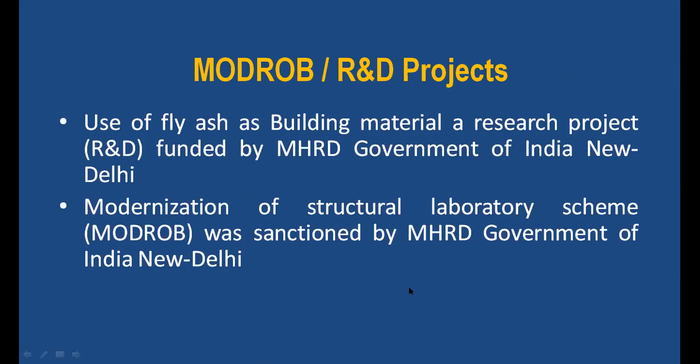Some of his R&D projects and MODROB projects include work on the use of fly ash as building material research projects, funded by MHRD, Government of India, New Delhi. He also worked on the modernization of the structural laboratory scheme, that is MODROB, which was sanctioned by MHRD, Government of India, New Delhi.

Preparation of the draft code of practice for stressed steel bridges for the Indian Roads Congress is a major contribution of his.

Some of his membership details: he is a life member of the Institution of Engineers, life member of the Indian Concrete Institute, life member of the Association of Consulting Civil Engineers (ACCE), life member of the Indian Water Works Association (IWWA), life member of the Indian Society for Wind Engineering, and life member of the Indian Association for Structural Engineers.

Regarding seminars, workshops, symposiums, and conferences: he was convener for the Second National Conference on Wind Engineering (NCWE) in 2004, organized from 12th to 14th February. He also organized a number of STTPs.

In association with other bodies, he has contributed as an examiner for PhD and MTech projects for Amravati University, Nagpur University, Pune University, Shivaji University, IIT Madras, IIT Bombay, and MANIT Bhopal.

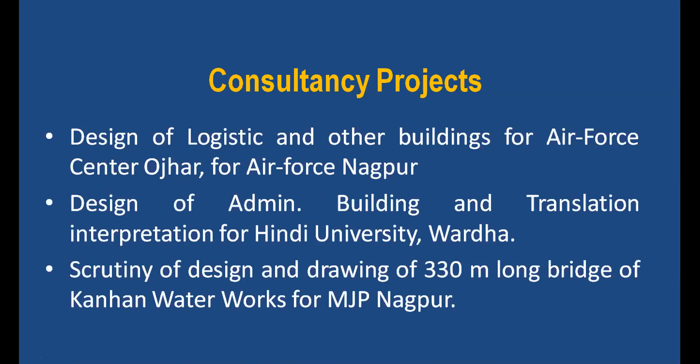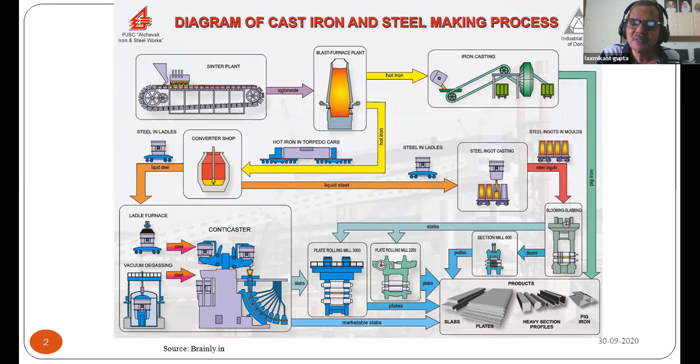This is a flow diagram of the steel making process. In the hot rolled process, iron ore is converted into a basic material, which is then placed in other machines with all the processes, and we get slabs, plates, heavy sections, and pig irons as products of basic steel. This product is then converted into our basic structural steel sections in the rolling mill. This is the layout of the steel plant, where the basic steel material is generated from the iron ore.

Now, why is steel considered a perfect material? It has some native properties: very good strength, very good ductility, and is capable of standing substantial inelastic deformation without losing strength. The very good strength refers to its tensile strength, and a good product of structural steel has good ductility. Therefore, if it has good ductility, it is capable of standing this substantial inelastic deformation without losing strength—these are related to each other. If ductility is good, the third property will definitely be good.

So steel has good performance; it is seen that there is good performance during many earthquakes. A renowned structural engineer said that well-designed steel structures don't need cosmetics—they give good aesthetic if properly designed. Meaning if the force required is 100 ton, and you design for 110 ton, then it looks beautiful. But if the force required is 100 ton and you design the structure capable of taking 200 ton, then it will not look good. So well-designed structures don't need any cosmetics; they give good aesthetic.

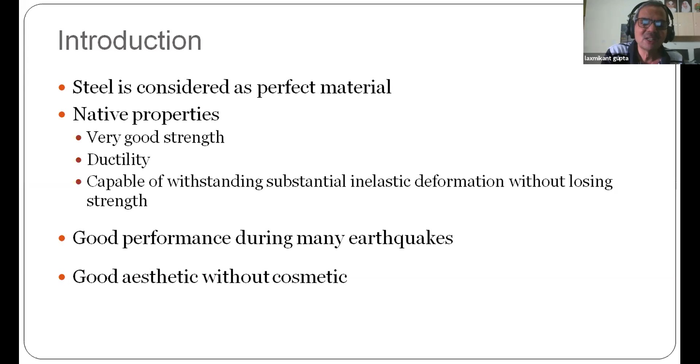Now, types of steel. Here I am cautioning you all: in early days, there were many codes related to structural steel—IS 226, 2062, 1977, 8500. All these codes—226, 1977, 8500—have been merged into a single code, IS 2062. Of course, the merging was done in a phased manner, not in one stroke. Initially 226 and 2062 merged, then thereafter 1977 and 8500 were merged. So now there is a single code which covers all types of steel, that is 2062.

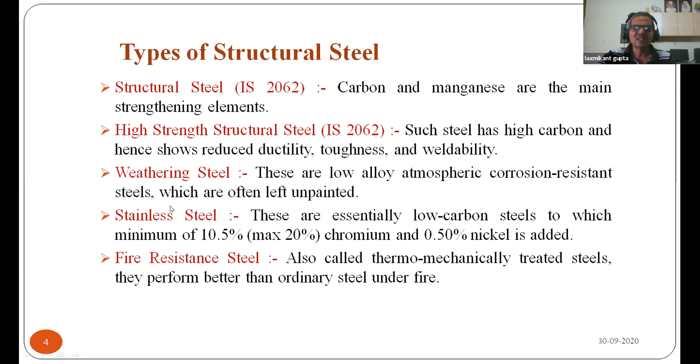2062 covers carbon steel, where carbon is the main strengthening element, that is structural steel. It also covers high strength structural steel. Then there is weathering steel, and also stainless steel. There is also fire resistant steel, also called thermomechanically treated steel. So the structural steel in our question conforms to 2062; these other three are special steels that may be needed at special places.

Now these are the basic properties to be considered, as per IS 800:2007. Density, unit mass is 7850, modulus of elasticity E is 2.0 into 10 to the power 5, Poisson's ratio is 0.3, modulus of rigidity G is 0.769 into 10 to the power 5, and coefficient of thermal expansion alpha is 12 into 10 to the power minus 6. Some people take their own values—let's say if you take E as 2.05, then your deflection will change.

The IS code has made it standardized that the property should be taken uniformly for all design and analysis purposes.

These are the various forms and shapes of structural steel: I section, L section, channel section, T section, hollow tubes, and flats. These are all basic sections.

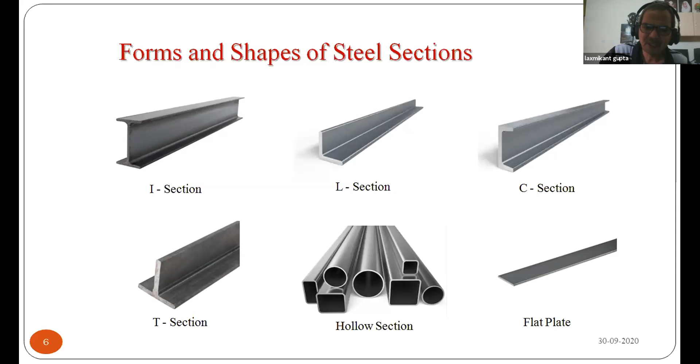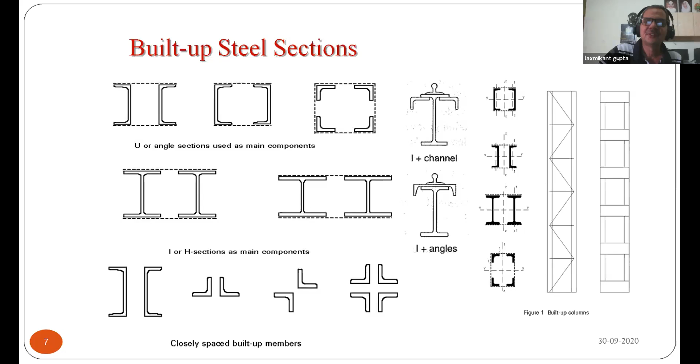Then the behavior of structural steel. We normally test it, everybody knows we go for the tension test. Why the tension test? This is the only test which is independent of dimension.

In compression test, the dimensions play a role through buckling and bending. In tension test, you are stretching the material in the opposite direction and the resistance is offered by the material against deformation. So thereby you can define that stress is equal to the resistance offered by the material against deformation. It is known as stress, not just load upon area or force upon area. It is nothing but the resistance offered by the material against deformation.

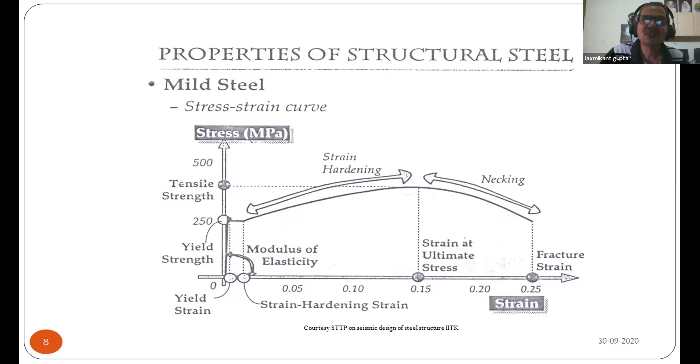This is very important. Now there is another way to present this stress-strain curve - it is idealized to two straight lines. This idealized straight line curve is our basis while doing design by limit state, plastic theory, or elastic theory. So what we take is that at yielding, the line becomes straight - the yield plateau becomes a straight line - and then strain hardening takes place. The strain hardening modulus is 2-5% of the normal modulus of elasticity.

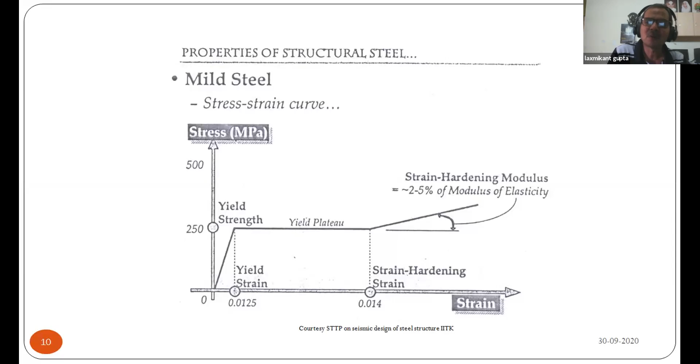Now this is the chemical property of the material - it should contain certain chemicals, and there are maximum limits allowed. Carbon percentage, manganese, sulfur, phosphorus, silicon - these all have maximum allowed percentages, with the rest being iron. If the carbon percentage increases, ductility will be lost and there will be problems with weldability. So normally we send the sample to a chemical laboratory for testing to check whether it is okay or not.

Each type of material with a different chemical combination requires a different type of welding electrode - a common welding electrode is not applicable to all types. You have to carefully select it. It is written on the packet which grade of steel it is compatible for, because weld is essentially a fusion material generated.

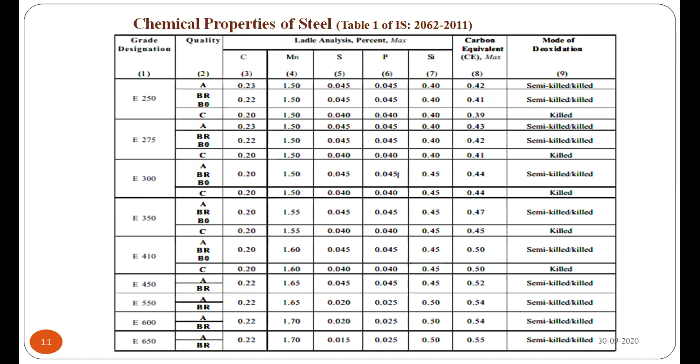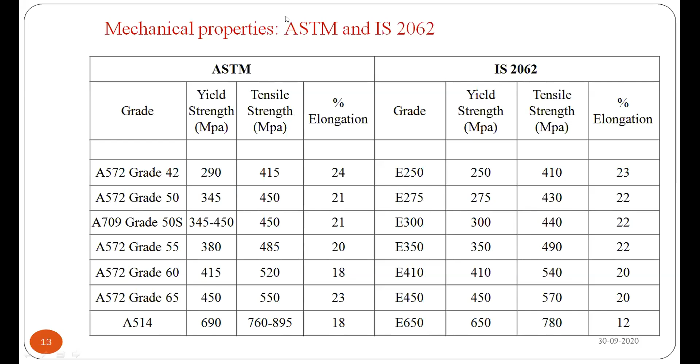Your PPT is visible now? Yeah, number 12 PPT is now on the screen. I think your mic was muted, so no voice. No voice sir, you have to mute your audio and then again start, or select the mic type in the mic property box. Now you can unmute and your voice will start. You are unmuted presently. Now yes, please.

Sorry for the interruption, this power has created a problem. Okay right, so what I'm talking about is the property.

Chemical property. Now coming to the physical property. I have mentioned this in the table here. This is as per IS 2062/2011, with minimum tensile physical property, which also has to be minimum, and the chemical property also has to be maximum. So be careful, the chemical property is maximum and the physical property is minimum.

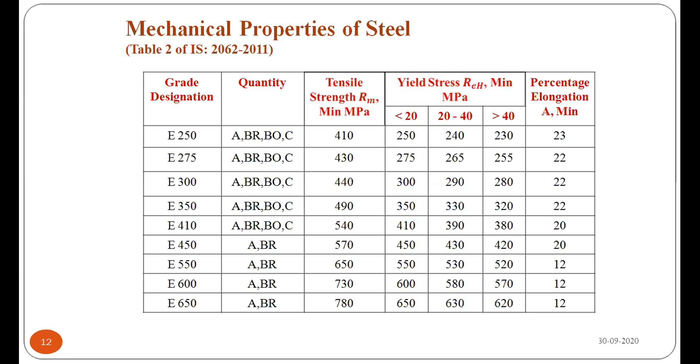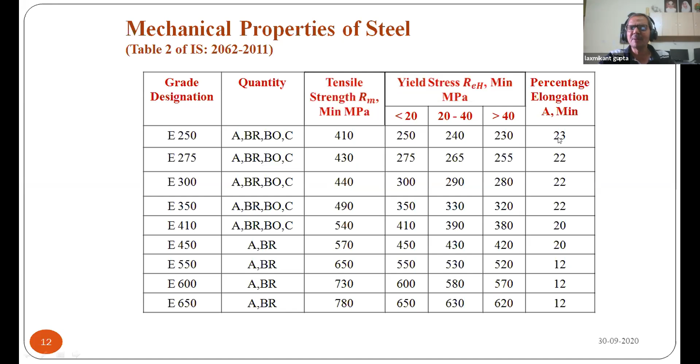So these are the values mentioned here. If I take E250, the tensile strength is 410, yield stress is 250, 240, and 230. So as you go to higher thickness, the yield stress reduces. Then percentage elongation is 23%, and this has to be a minimum property. But what I've seen mainly when we test it in laboratories or other places, we find that these values are always more. Here you should not compromise based on percentage elongation, because percentage elongation is nothing but a criterion for ductility. If this is less, ductility will be less.

Then this is the comparison of 2062 with the ASTM standard, meaning if you have any steel from outside, this shows the equivalency they have. Then, method of sampling: you cannot test I-section, channel section, T-section, all other sections directly. You have to draw samples by cutting pieces from these sections at a distance mentioned as 1/3 to 2/3, all taken from the 2062 source.

This sample has to be cut by cold cutting, not by hot cutting. You should not go by hot cutting, because if hot cutting is used, it will damage your sample and you will not get the correct physical property. Second thing, if you are drawing a sample from a plate, then the sample has to be cut along the grain, not across the grain.

Along the grain gives correct physical property. Though we assume isotropic material, meaning E in X direction equals E in Y direction, we always get higher property if we cut a sample along the grain. What does it mean by along the grain? It means in the direction of rolling. A plate of 1.2 meter width, 3 meter long, is rolled in the 3 meter length line, so you should always cut a plate in the 3 meter direction.

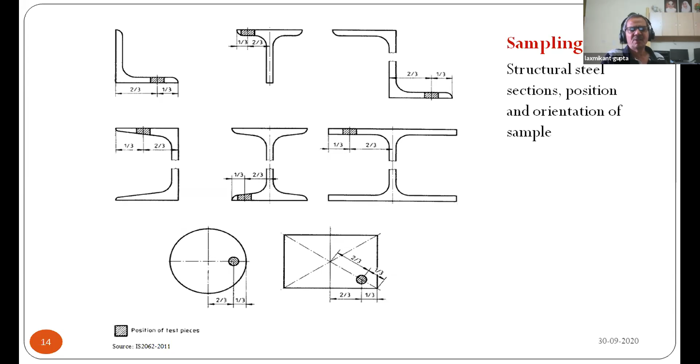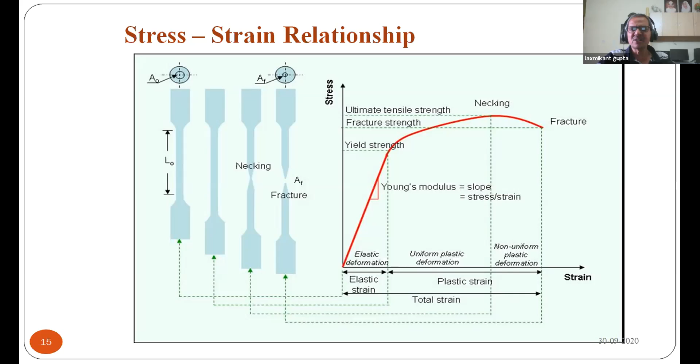Now, effect of temperature on the stress strain curve. It varies considerably at very high and very low temperature, and the value of sigma y, sigma u and E drops, while maximum elongation at failure monotonically increases. The coefficient of linear expansion is very high in case of steel, and because of its good ductility property, the elongation increases. Therefore when one increases, the other decreases. So I can predict from the result: if the percentage elongation increases, the stress level will be low, and if the stress level is high, the percentage elongation will be low.

Now what is the requirement here? Temperature. In 24 hours, 24/7, 365 days, there is no prediction of when an earthquake will occur, at what temperature, and at what place. Therefore I took the case of effect of temperature at both high and very low temperature. We have much problem in low temperature, because in all valleys you always find there is a tremor. So there is the effect of temperature. These things are allied requirements for the basic analysis of structure, you should know it. That is why I am covering all these parts.

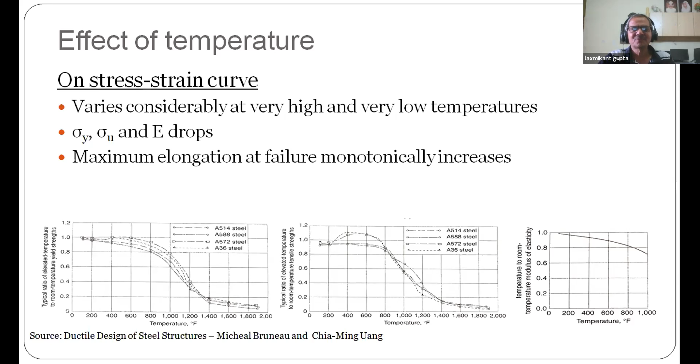Now, effect of temperature on ductility. It does not have adverse effect on yield strength below room temperature, but low temperature has substantial effect on ductility. Behavior changes from ductile to brittle, giving the ductile to brittle transition temperature. This behavior is checked by the Charpy V-notch test, which we taught in second year strength of materials. The Charpy V-notch test helps you understand the ductility of the sample with the effect of temperature. So you can take a sample at different temperatures, test it at room temperature, and find the transition stage of ductility using the Charpy V-notch test.

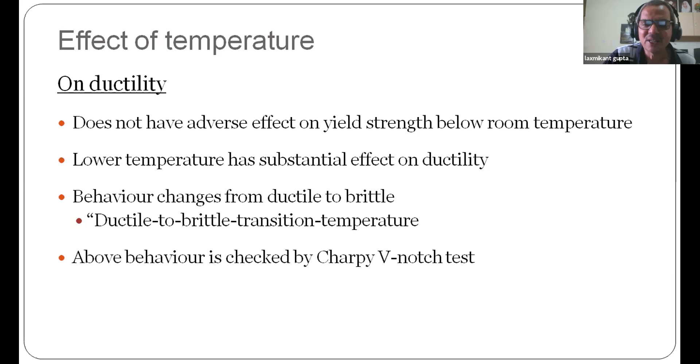Then effect of strain rate. I told you about strain rate. The effect on tensile strength: tensile strength increases at higher strain rate. This is crucial for blast resistant design and of little significance in earthquake resistant design. The probable yield strength, the margin between actual average yield strength and specified yield strength, increases over the years for some structural steel, even though the steel specification itself remains unchanged.

So effect of strain rate. Strain rate means loading and unloading. Let us say a structure shakes many times in a year, say 10 times. So even though the material remains the same, a change occurs because of change of strain rate, because the loading action is not the same all the time. It varies from time to time.

Then strain aging. Now you can see in this lockdown period, especially with IPL going on, cricket players are very much worried about their practice. They want to practice but are not allowed to go to the ground, so they practice in their colonies or at home. Why? That is nothing but strain aging. If they don't practice, there will be loss of strength. The same structure has the same problem, and our human body also has the same problem of strain aging.

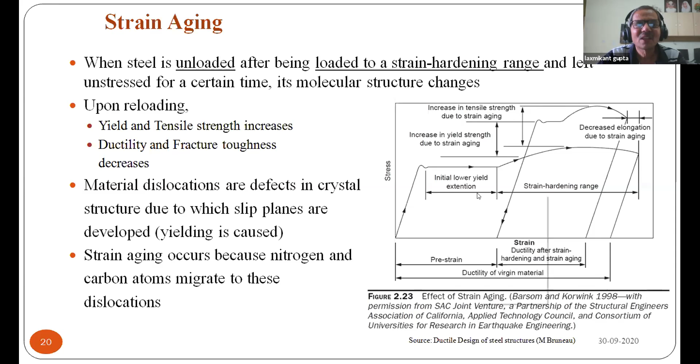Then the effect of corrosion. Stress corrosion is more important. Stress corrosion transforms ductile steel into brittle material without substantial visible evidence, and stress corrosion cracking can develop unexpectedly. Material under tensile stress exposed to specific chemical acceleration at higher temperature leads to corrosion fatigue, which develops in uniformly corroded material where cracks are visible and reduces fatigue life of steel. So stress corrosion needs to be studied because buildings are old, of life more than 25 years, and there is a possibility of corrosion developing because of weathering action. So that effect has to be seen.

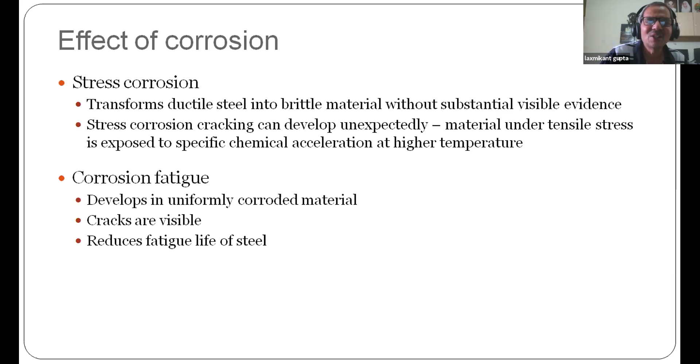Then ductility of corroded steel increases stress level for a given load, giving a longer stress range under fatigue type of cyclic loading. Monotonic structural ductility of steel is not detrimentally affected by corrosion.

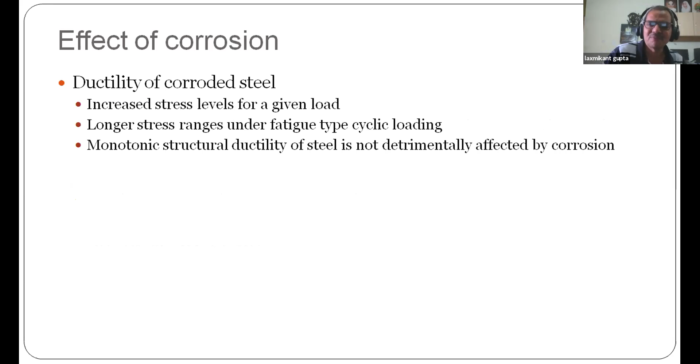Then we have our methods of design. Now, when I started my career, I was using the 64 code, the 1964 code, and probably I used it also in my PhD program, because when I was submitting, the 84 code was coming into existence in the market. At that time it was not like today, where whatever code we make, we circulate draft code for review and comments, and then we go on working. The 84 code became available to me around 88, 89, when I understood that the 84 code had come. So at that time I was using the old code, and only one method was available.

That is the working stress design method. A very good, useful method. In some other country codes, they write it as ASD, allowable stress design method. So what is this? Stress caused by the characteristic load must be less than an allowable stress, which is a fraction of yield stress. So it doesn't allow stress up to yielding, it doesn't allow load up to failure, that is including load factor. So we take characteristic load and allowable stress. That's what is called allowable stress, and allowable stress equals yield stress upon factor of safety. So we work on factor of safety.

So what are the limitations? We don't work on non-linearity, non-linear behavior in the post-buckling state, and the property of steel to tolerate higher stress by yielding locally, and distribution of loads is not accounted for. There is no allowance for reduction of load in statically indeterminate members. So these are limitations - we are only in the linear zone, so that's why everything is linear. So what I'll tell you is, we are working in a domain from 0 to yield point, meaning we are only interested in yielding failure. That is all, nothing more than that.

Then we switched over to limit state design. So what do we want? The objective of design is to achieve an acceptable probability that the structure will perform satisfactorily for the intended purpose during the design life. So we are working on probability. When you are working on probability, it means you have to think over the entire life - what different types of failures can occur, what different types of loads can occur. So that is what the acceptable probability we have to understand, with an appropriate degree of safety.

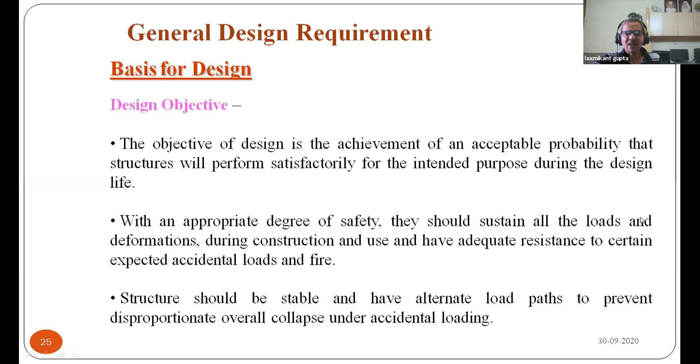So now from ASD, or working stress, or the elastic method, we are working out all the probability and load paths for proper functioning of the structures throughout their life. That was our design objective - this is the design objective of IS 800-2007. And the method which is used is the limit state design. Now, one note has been mentioned here in our 2007 code: when limit state design cannot currently be used, working stress design can be used.

They have mentioned in the last part of the code the process of working stress design also. If anybody wants to solve a structure that is so complex with working stress, he can do it with working stress.

Now, this design process, structural design including design for durability, construction and use, should be considered as a whole. The realization of the design objective requires compliance with clearly defined standards for material, fabrication, erection and in-service maintenance.

Why are these clauses added? Here also the objective, here also the method. A lot of limitations are made applicable in IS 800 code working stress design - dimension wise, stress wise, and load application wise.

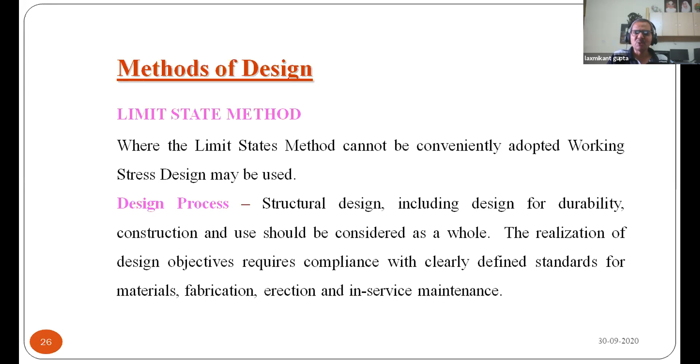Now, loads and stresses. Here I will speak about following IS 875 - Part 1 and Part 2 are from 1987: Part 1 for dead load, Part 2 for imposed load. Part 3, revised in 2015, is for wind load. Part 4 is for snow load and Part 5 for...

...special load, along with IS 1893 all parts as and when needed, along with codes for other special loads as per the respective loading. Because in certain industries you need crane load, so for crane load you have to go for IS 807. For blast load, IS 4991.

For all general purposes, the load combination has to be taken with loads from IS 875, parts 1, 2, 3, 4 and 5. Then secondary effect has to be considered.

Now how do you work out secondary effects? Allowable effects during construction and settlements have been mentioned in the National Building Code 2016. If your settlement or level difference between the junctions of beam and column exceeds permissible limits, then you have to calculate the additional moment because of this settlement or differential levels - these are called secondary effects. So NBC 2016 should be referred for calculation of secondary effects.

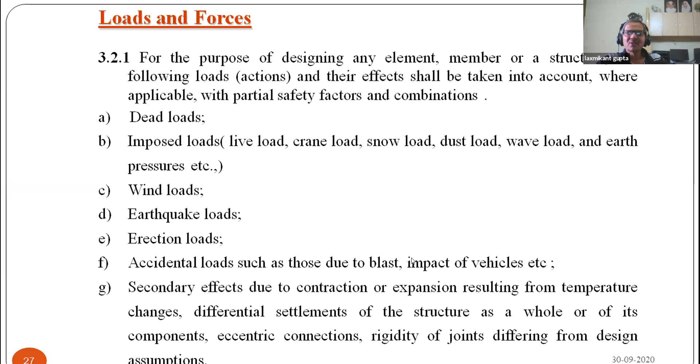These are discussed already. Then the load combination - now load combination is a different story. Load combination as per 875 Part 5 is different, simpler, without load factor, because IS 875 is with working stress conditions, so no load factor or combinations are mentioned. If you go with IS 800-2007, combinations are different; IS 1893 different; bridge code, a rare combination - so many new combinations are added that combinations are still in a confusion stage.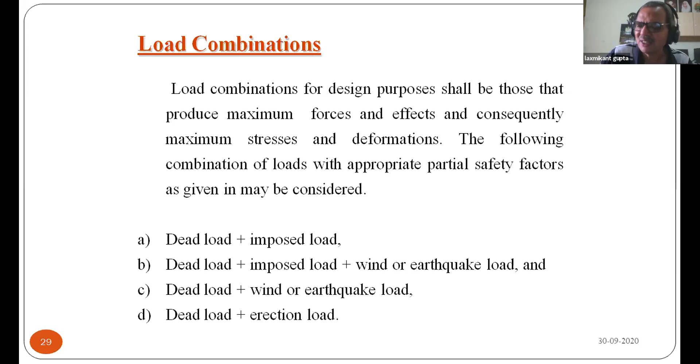But as far as steel design is concerned, I will follow IS 800-2007 along with IS 1893 as far as earthquake force is concerned. Now the backbone of limit state design, the backbone of earthquake design, is plastic analysis.

At many places, plastic analysis is still taught. I am very happy that where plastic analysis is taught, engineers will definitely find it easy to understand the limit state approach as well as the earthquake resistant design approach. So, if not over and above the syllabus, please teach students plastic analysis in brief about its general behavior.

So plastic analysis - these are all simple assumptions. Plane section remains plane, not linear with stress; it is linear in the strain diagram, because the stress diagram becomes a rectangular block. So there is a variation in the strain diagram. The material is homogeneous, isotropic, and the section is divided into equal parts - meaning at ultimate stage, the indeterminate structure is converted to a determinate structure. Total area on the tension side equals total area on the compression side, and that's why the section is divided into equal parts.

Each layer is free to expand. There is no effect of axial force in the member because there is no scope available to adjust that force - axial plus bending, only bending can occur, the axial need not be adjusted. So what is the ratio? P upon Py, where P is the actual axial force and Py is the yield axial force. If this should be less than 0.15, then the effect of axial force should be neglected.

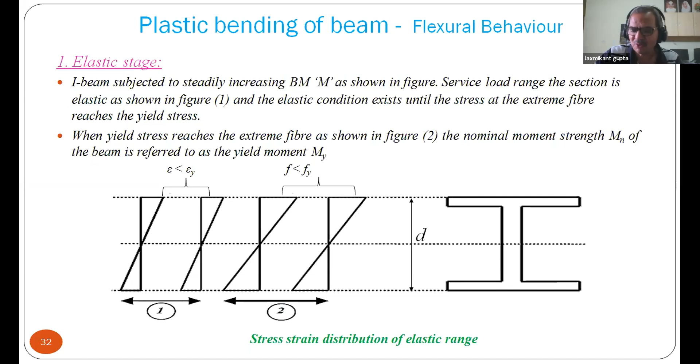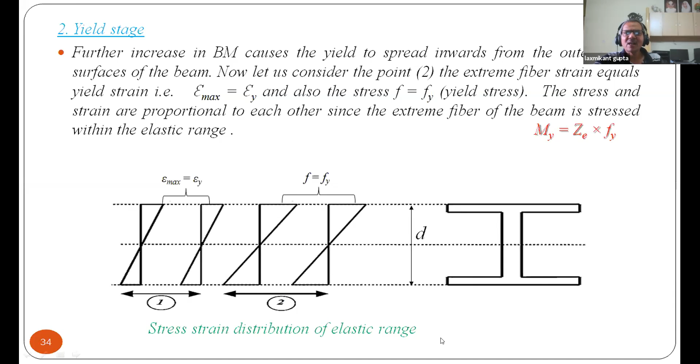Now if I increase the stress such that sigma becomes sigma y, epsilon becomes epsilon y, meaning the stress becomes yield stress, and that will be on top fibers or bottom fibers. So my moment becomes My, and this My will be equal to Ze into Fy. Then all the fibers below this, meaning top fiber and bottom fiber, are at yield stress, and all other fibers are in the elastic range. Now when I increase again, it will reach first in the flanges.

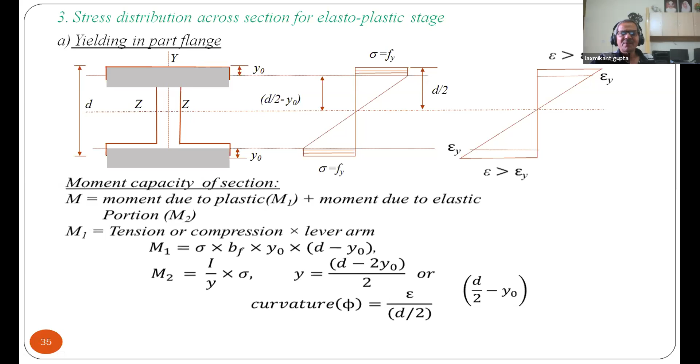The web is in the elastic stage, and the flanges are in the yield stage, meaning they reach the plastic stage. So total moment capacity will be equal to moment due to plastic capacity of the flange plus moment due to elastic capacity of the web. So that is calculated. Now here, since this is a mixed diagram, the relationship of curvature changes. You can see the relationship of curvature changes, and that line doesn't remain a straight line, it now takes a curve.

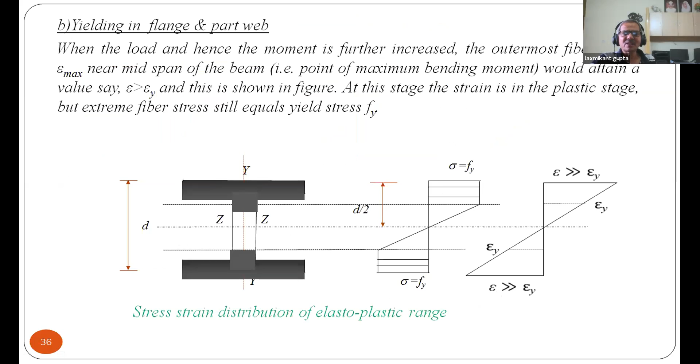Then it propagates inside the section. So these two stages, part A and B, are called the elastoplastic stage, neither fully elastic nor fully plastic. Then it goes to full plastic, meaning the entire section becomes plastic. So the moment now, My becomes MP, equal to Fy into Zp, and Zp is called the plastic modulus. Plastic modulus is an enhanced geometrical property of a cross section which improves the strength of the member.

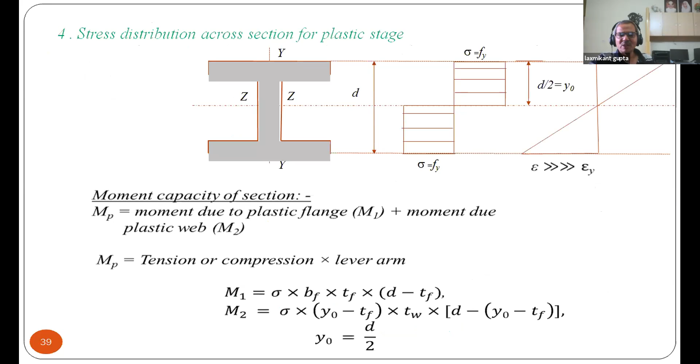So MP is equal to sigma y, Fy into Zp, and this diagram becomes a rectangle diagram, where total tension equals total compression, and the strain is higher than yield strain. The strain diagram is linear, not a rectangle. That's why the moment is calculated for the entire cross section: moment due to plastic in flange plus moment due to plastic in web, and total tension equals total compression times lever arm. The moment is calculated, and this is the propagation of the generation of moment along with the generation of the plastic hinge.

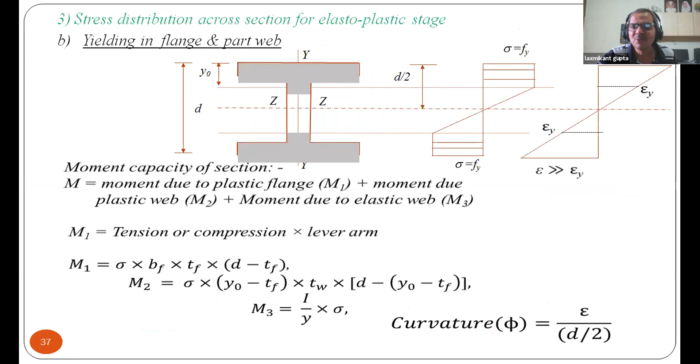Now what happens to this curvature relationship? This curvature relationship becomes infinite because d by 2 becomes 0. So therefore this becomes infinite, and I can define the hinge at which infinite rotation can take place and the member goes into the plastic stage. That is called the plastic hinge.

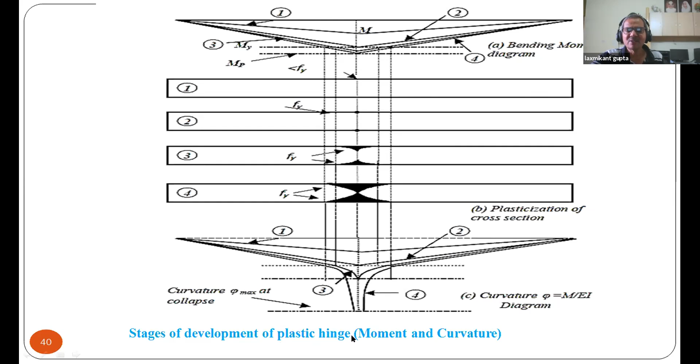So plastic hinge formation: the plastic hinge forms where the plastic moment forms, and the plastic moment forms where the maximum bending moment occurs. So this is the stage-wise formation of the plastic hinge, and the rotation of the structure in this format leads to complete collapse, as you can see in this complete collapse index. This is the moment-curvature ratio of a parallel flange section. You can see the moment becomes uniform up to a particular value, and then when it goes into the elastoplastic stage, it becomes infinite.

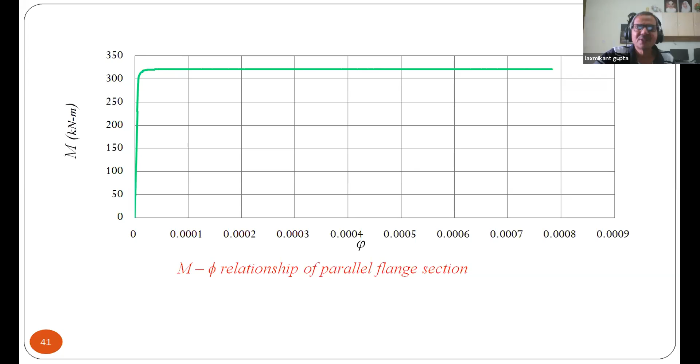This is the non-dimensional parallel flange beam moment curvature relationship. This relationship becomes the basis of classification of the cross section.

Based on the plastic behavior of the cross section, these sections are classified as plastic, compact, semi-compact, and slender. This classification is useful in classifying the ductility of the member. So when you understand ductility of the member, you should know classification. When you want to understand classification, you should know plastic theory, and then you should know the moment curvature relationship.

What we do, we directly talk on ductility. We don't know what is the background, what is the source. So the source is ductility, cross-section ductility, member classification. Member classification means moment curvature relationship. Moment curvature relationship means plastic analysis of the beam. So once you don't know plastic analysis, you cannot understand the member ductility as well as the section ductility, cross-section ductility. This is when the section has high rotation capacity.

High rotation capacity means, if I am able to do 100 push-ups, when I can put in 100 push-ups, I have good diet, good proteins in my body, good energy, then I can go for 100 push-ups. Similarly here, when a section becomes plastic, only when it has a good cross-section which can take a high rotation, high deformation, means you can get this very good curve.

So these are the definitions. Plastic section, compact section definitions. Let me just read this definition: a cross section which can develop a plastic hinge and have the rotation capacity required for failure of the structure through formation of a plastic mechanism is called a plastic section, and the width to thickness ratio of plate elements shall be less than that specified in the table mentioned for the plastic section.

When a moment is applied and the whole section goes into the plastic stage, this can be defined as a moment - the resisting capacity of the full yielding of the cross section is known as the plastic stage, and a new property is generated, the shape factor, the ratio of full plastic moment versus yield moment. Normally it is Zp upon Zy or Ze, Zp upon Ze, that is plastic modulus divided by section modulus, that is called the shape factor.

And the collapse load is a load at which infinite deformation occurs, converting the structure into a mechanism form satisfying the equilibrium condition, is called the collapse load, or a constant load at which infinite rotation can take place is also known as collapse load. And the load factor is the ratio of collapse load versus working load.

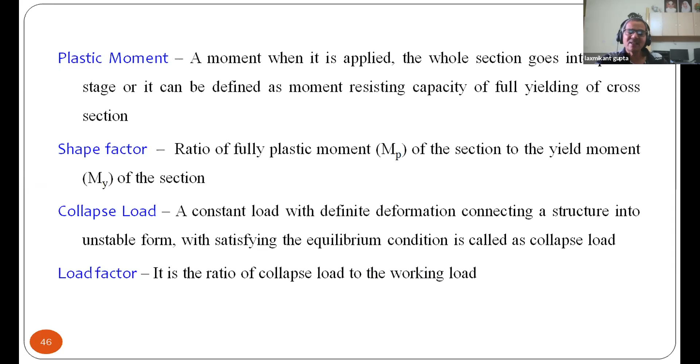Now this load factor, as per the plastic theory of IS 800 1984 code, as per the 2007 code, is defined as partial safety factor. The thing remains the same, it is not different. The definition of partial safety factor is collapse load upon working load, and load factor is also collapse load upon working load. This is the moment curvature relationship and shape factor for different types of cross sections.

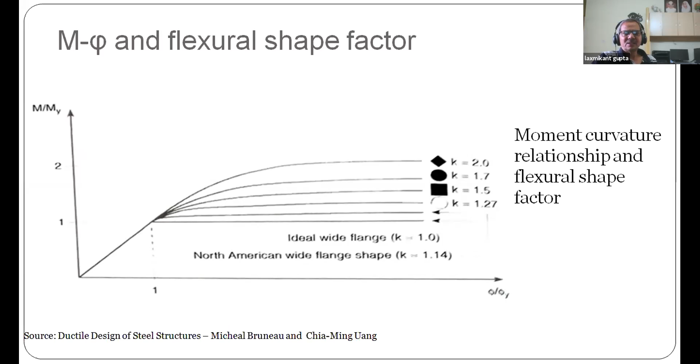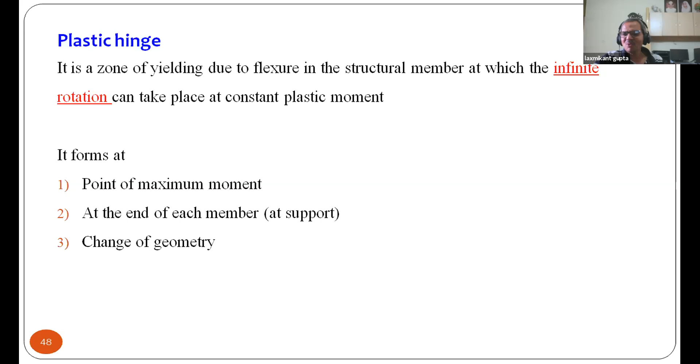Okay, where the hinges are formed. Now why is this needed? Push-over analysis. In push-over analysis, you should be able to predict where a hinge is going to form. It's a zone of yielding, due to flexure in the structural member, at which infinite rotation can take place at constant plastic moment. So it forms at the point of maximum moment, at the end of each member, or at a change of geometry. So this is the basic source required for your push-over analysis.

Yes, you can relate it. Now, in the assumption I have made, there is no axial force acting. So that analysis of beam subjected to load, that is plastic bending of beam, there is no effect of axial force. But there is an effect of axial force, because there is no scope available to adjust the bending stress and the direct stress. So there is an effect, and what we do is reduce the plastic moment capacity of the member.

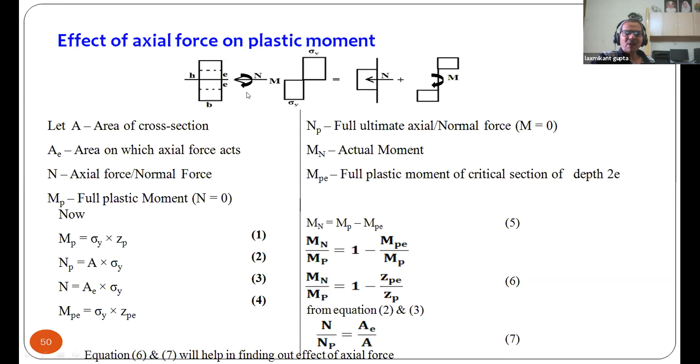So in general, Mn is the net moment and Mp is the plastic moment when no axial force is acting. It is 1 minus N upon Np. If this ratio is 0.15, then the effect is almost negligible, Mn upon Mp is equal to 1.

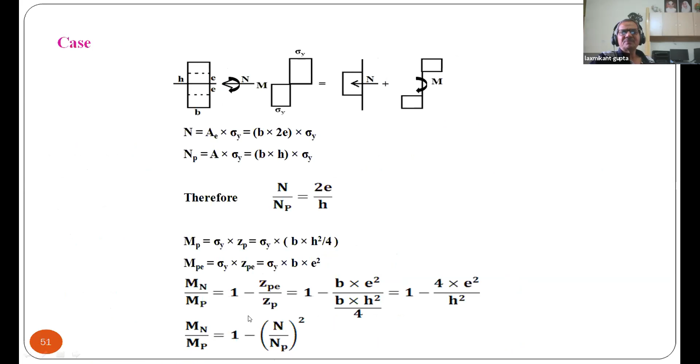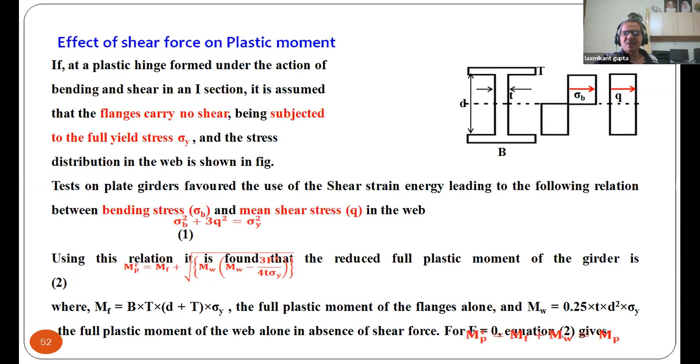Similarly, there is the effect of shear force on plastic moment. That's why in code we have to calculate the shear capacity. If the web is not capable of taking the shear, that is Vd equal to Av into Fy upon root 3 into gamma m naught, then we have to calculate the revised value of Vd and the revised value of plastic moment, as per the 2007 code of IS 800. So this is the effect of shear force on plastic moment.

Then simple definitions of redundancy, how to calculate redundancy, what are the redundant supports, how to calculate all these things, this is about redundancy.

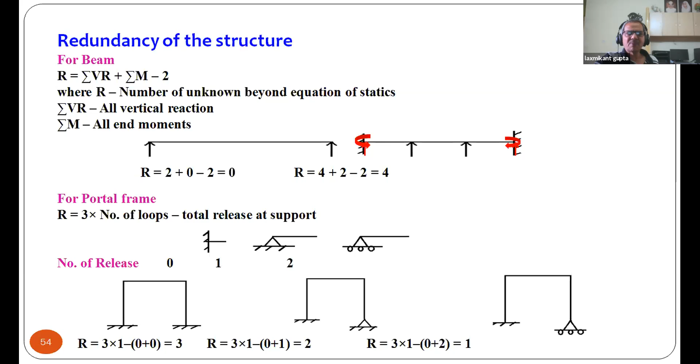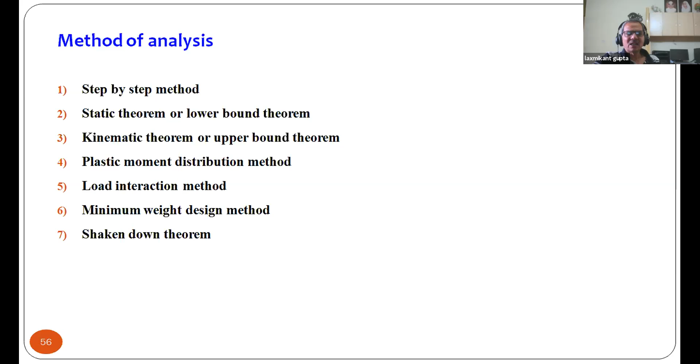Then methods of different analysis. There are so many methods of plastic analysis, a few I have mentioned here. This is the step-by-step method, in which at every step you can calculate the load required for formation of each hinge. That is the step-by-step method.

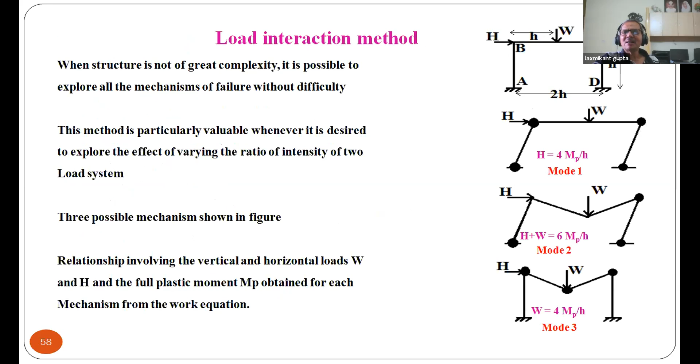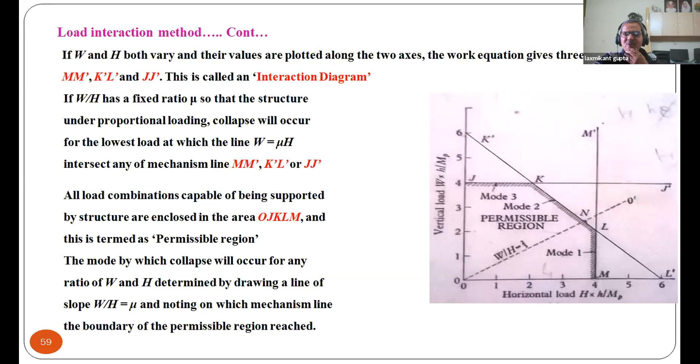Then the second method which I'm just discussing here is the load interaction method. You can interact between the gravity load versus lateral force, and we can predict under which mode the hinge is going to form. Therefore, strong column weak beam theory has been generated based on the load interaction method. You can see the permissible zone in which the interaction can be generated between the gravity load versus lateral load.

Then the basis of pushover analysis. How much time do we have? Okay, it is nothing but this step. That's why I told you, do both the methods.

Background for the pushover: it is a step-by-step method of plastic analysis. A constant relative magnitude of lateral load is applied, increased until displacement is reached. The gravity load is kept constant, W is kept constant, H is increased. The structure is pushed sideways to determine ultimate lateral load resistance and sequence of events, that is plastic hinge formation. So whatever is shown in bullets here, I told you in the background. You must read the background, then you will be able to do the pushover analysis.

People just take SAP software and do pushover analysis in SAP, but what is the background? They don't know. So read the backgrounds. What is the function of pushover? What is the basis of pushover?

So pushover analysis is highly dependent on the lateral load distribution adopted. Consider multiple lateral load distribution patterns. Here also you should know the targeted places where the hinge can form, there also one step is required here. Then there are monotonic pushover analysis and cyclic pushover analysis.

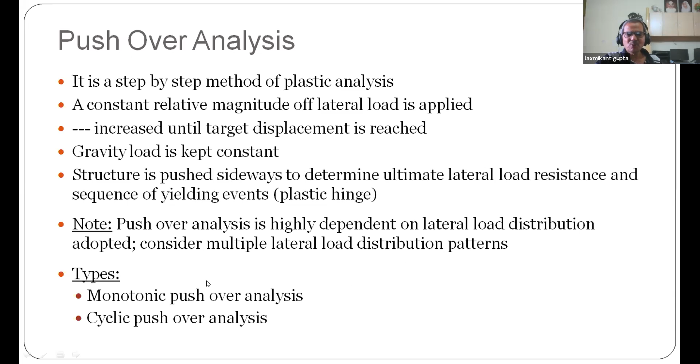For the ratio of Ixx upon Iy of greater magnitudes, the compression flange shall be supported by the cross beam so that lateral buckling should not occur in that beam.

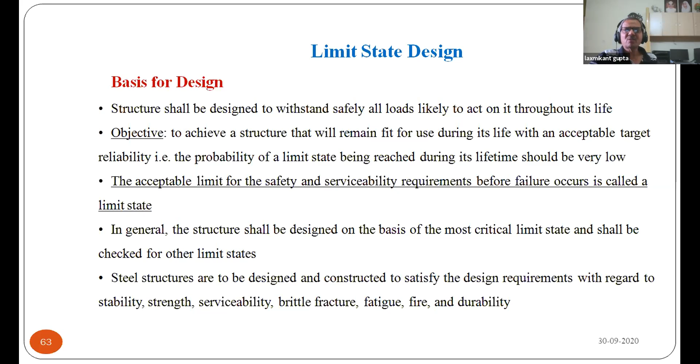I'll tell you one thing: strength and stability is also inbuilt. So there are two limits that you consider: the limit state of strength and the limit state of serviceability.

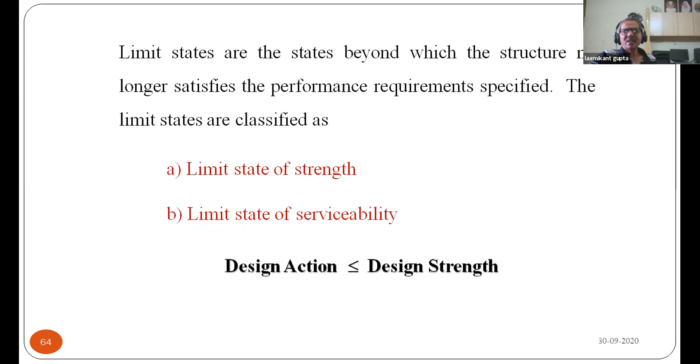Strength should always be greater than the action. The actions are calculated as three types: permanent action, variable action, and accidental action. Permanent is nothing but normally the gravity loads, fixed load. Variable means imposed load, crane load, etc. Wind and earthquake are variable. And accidental is nothing but explosion and these things.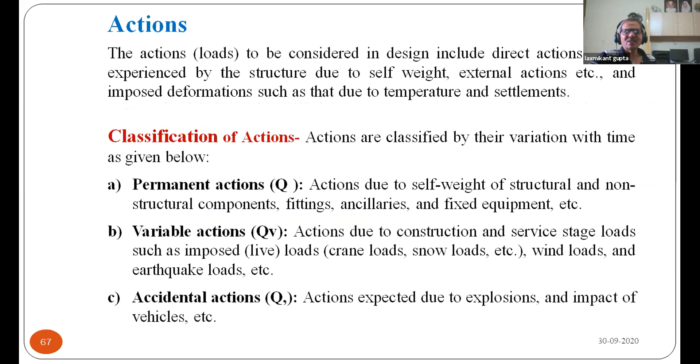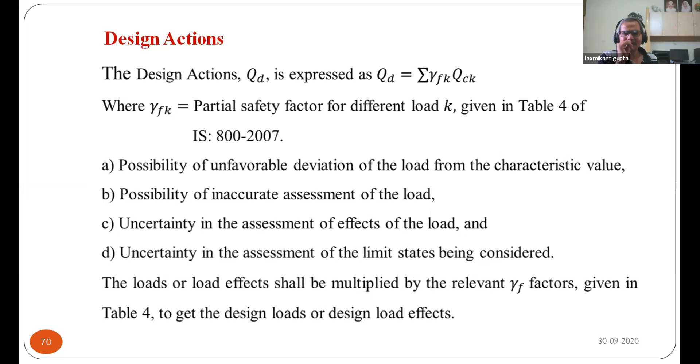For these actions, based on characteristic load, the load factor has been calculated, and these load factors are multiplied to the design actions because of the possibility of unfavorable deviation of load from the characteristic value, probability of inaccurate assessment of the load, and uncertainty of the assessment of the effect of load. So these load factors are multiplied to get the total design action on the structures.

For serviceability, it is always in working stress condition. Maybe for any method, serviceability is always checked in working stress condition.

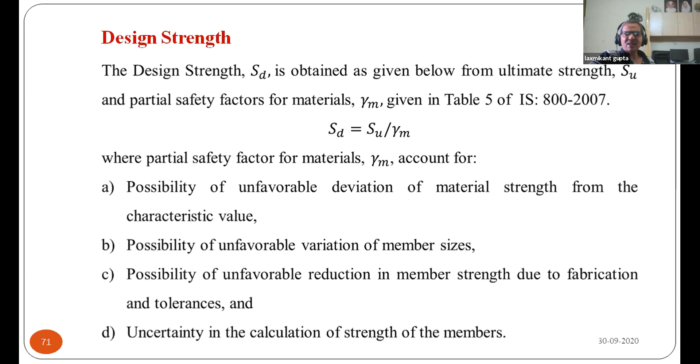For strength, the partial safety factor of material is considered, which takes care of the deviation of material property, unfavorable material member sizes, possibility of reduction in member strength due to fabrication tolerances, and uncertainty of calculation of strength of the member. So this factor of material means the maximum stress being reduced by a certain level so that safety occurs. So these are the safety factors for material.

Now there are geometrical imperfections: verticality, straightness, flatness, fit, lack of fit, and tolerances. These imperfections may be of global format or of local format.

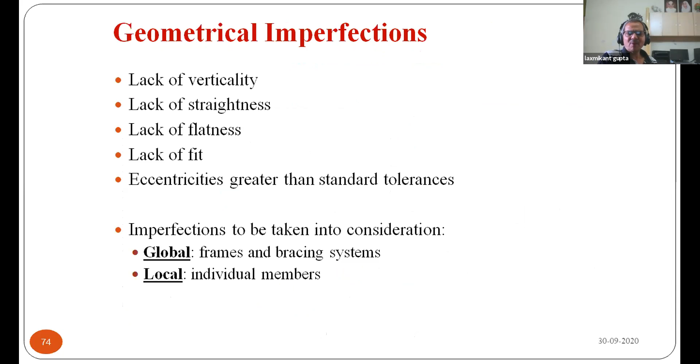And there is another problem of initial out-of-straightness. The member doesn't have a perfect straightness. So what we say is that 1 in 1000 is the parameter. If 1 in 1000 the out-of-straightness occurs, then we can say that there is no effect on the straightness of the member.

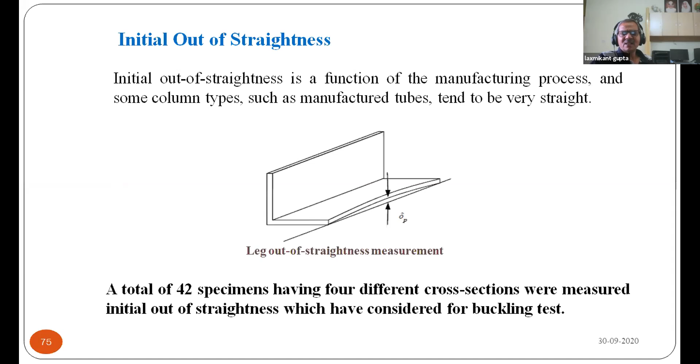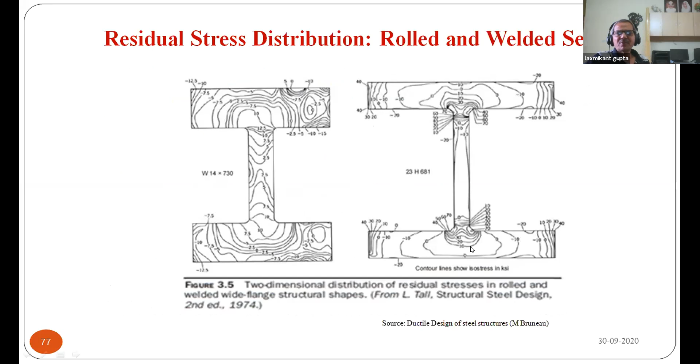And these residual stresses are useful at the time of extra requirement. They are a surplus balance available with us. So these are residual strengths.

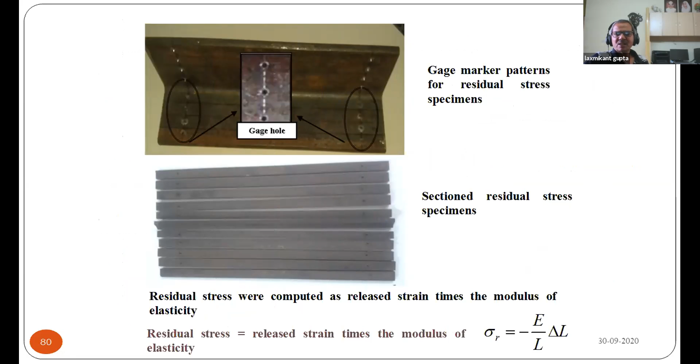This is a method of how to test it, one method of testing. There is a destructive method, we can measure the residual stress. One PhD scholar, Jyoti Balawe, did this testing during her PhD program, and this measures the values.

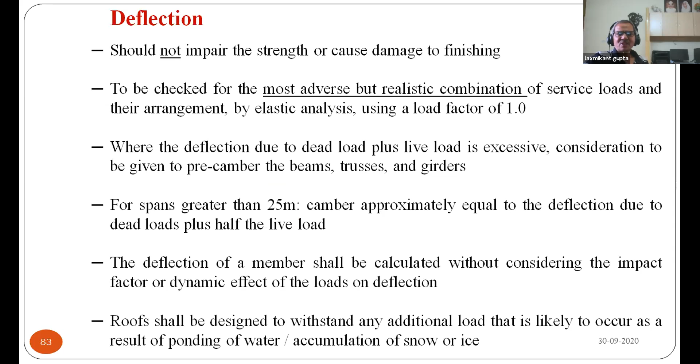Then deflections, that is the serviceability check. You should do the serviceability check. And these deflection limits are mentioned, various limits of deflection.

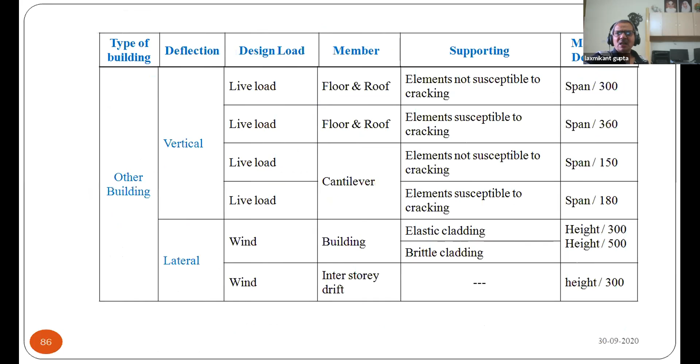Then vibration is also included in this code, and drifts are also included in this.

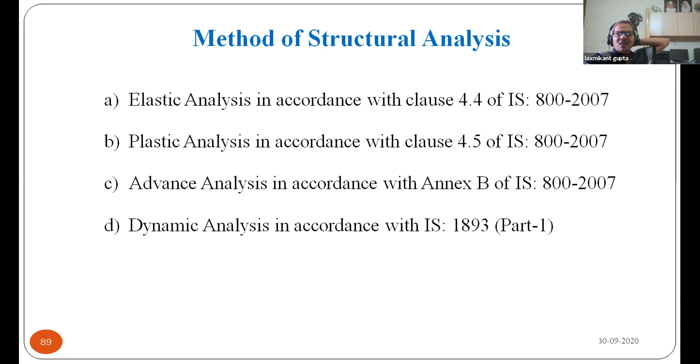So far, whatever I taught is the general design requirement, meaning the background story I have generated for the ERD design, to understand the concept. Then IS 800/2007 has given full liberty to use all methods - elastic, plastic, advanced, as well as dynamic method. All methods are given liberty to use. This is a part of total analysis.

Then different forms of construction: rigid construction with moment resisting frame, semi-rigid with release at support where some rotations are allowed, and simple meaning simple beam column methods. The code also says you should analyze the structure for notional horizontal load, which is equal to 0.5% of factored dead load plus vertical imposed load applied at each floor level. It should not be clubbed with other lateral loads like wind and earthquake - it is independent.

What is notional horizontal force? I just told you - it is notional, you have to calculate it to account for imperfection. That is, you have to calculate 0.5% of factored dead load plus vertical imposed load.

What about pushover analysis, monotonic and cyclic pushover? Oh, that is another detailed story, we have to take one more class. In the next session we will look after that - no, I will not cover that part because it is another analysis process. You have to go for the book. I'll tell you the book.

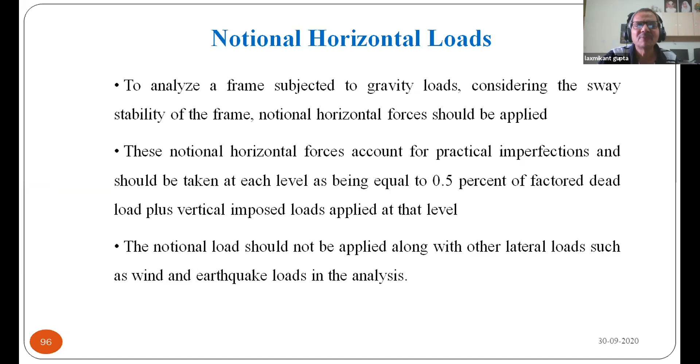Which type of bracing is better for seismic analysis? Tomorrow, so Friday, we'll have that discussion.

So I think today now we will stop here, and in the next session we will continue. The next session is totally devoted to the application of this background for our ERD. Now I can directly start with the application part, the reason being I know many of you may not have gone through the details of steel design.

That's why I was creating the background story, background preparation, for your understanding of the next part. And I request all those who are teachers and have the opportunity to teach steel design, please teach students the material and detail properties and total behavior, because in the field they don't know how to test it, where to test it, what are the requirements of testing, and why we do testing - because the major population of our civil engineers will go into the construction industry.

Not all the engineers we are producing are going to become teachers or designers. Most people go for execution of jobs, and I think the people who go for execution are the key persons for us. So let us take care of them, because they should know these things. If they know these things, they will definitely perform better in their field. So that is my request to all.